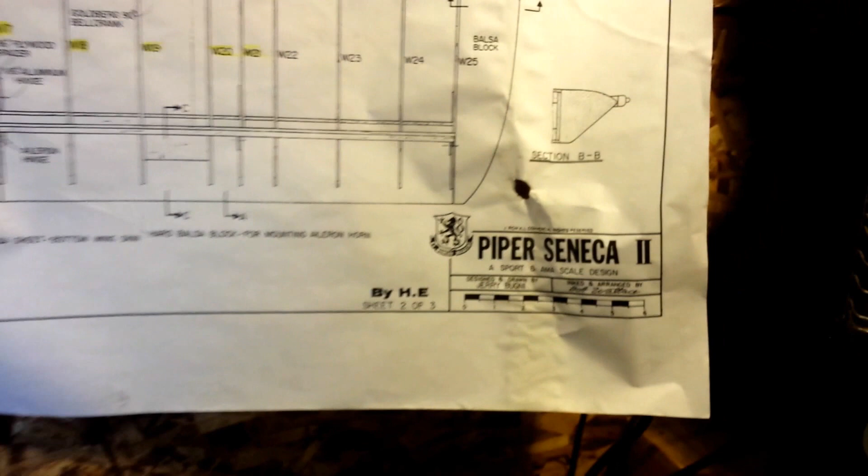Well, why are you in my shed? Well, this winter I decided to tackle this project. I've built probably about 15 kit planes, and I've never built a scratch plane before, so I've decided to go ahead and build this Piper Seneca II twin engine airplane, and I thought I would let everybody in on it.

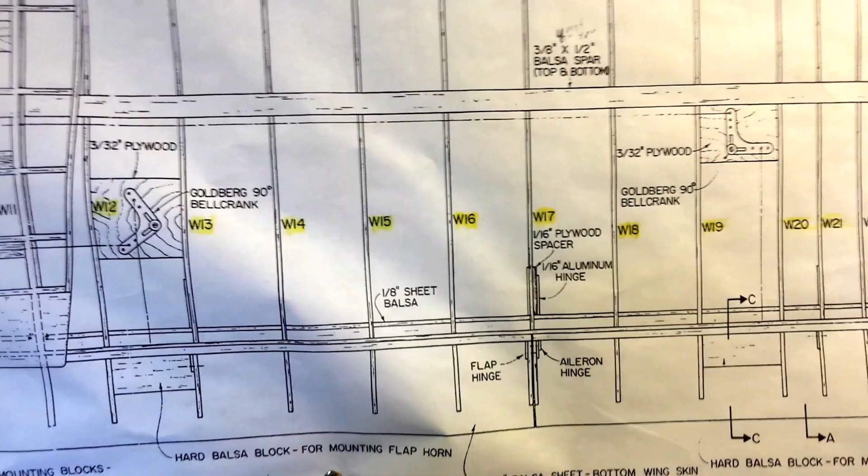So here we go. I just got the plans stuck up there so we could take a look at them real quick. I'm going to be making some changes on this. They got a lot of balsa. This whole thing is balsa, but that's the way they have it, and that's the way we're going to do it.

We're going to change the bell cranks. I'm going to put servos for each bell crank. I may do the flaps with one servo, but the throttle definitely and the ailerons definitely are going to have a servo just dedicated to them. But we're going to build this just like that plan says.

So I got the plans I'd say about 4 or 5 days ago, and I've started a little bit on it. I've worked on a few of the wing ribs, some of the formers for the fuselage. In fact, I'm working on one right now, F-15. And we got some more of the wing ribs here done, some of the nacelle parts, and I went out last night to the local hobby shop and I bought some more wood.

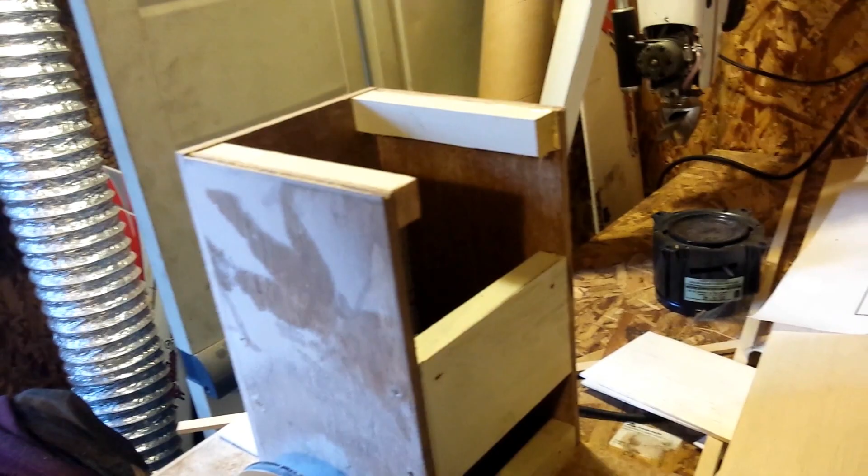But this is where the mess is. Oh, what a mess. But nevertheless, this is my homemade disc sander. Kind of neat, actually. I had a motor sitting around the shed for a year or so. Variable speed. Used a dimmer kit. It works. But this is where it's going to happen.

But let's get started. See where we're at here. Like I said before, this is what I'm working on right now. I'm putting everything in bags. I'm hoping to get this done in about 90 days.

It's winter outside here in upstate New York, and actually it's a weird winter. It's actually about 40 degrees outside now and raining. But I'm hoping to have this done to fly this season, this summer. But we'll see.

Who knows? But this is the former I'm working on right now for the fuselage, F-15. What I did was I took two pieces, 4-inch, glued them together, butt jointed them. I'll build another one and show you how I did that. But I was reading some articles online.

I could buy the wood, the thickness and the width that I needed, but then I started reading about how balsa is made, and they say that the larger the wood goes because of the diameter of the tree, like if you get an 8 or 9 inch piece, the edges are very soft, punky, and that you'd be better off gluing a couple 4-inch pieces together. The glues we use now are so strong, I don't think it's going to be an issue. But this is where we're at.

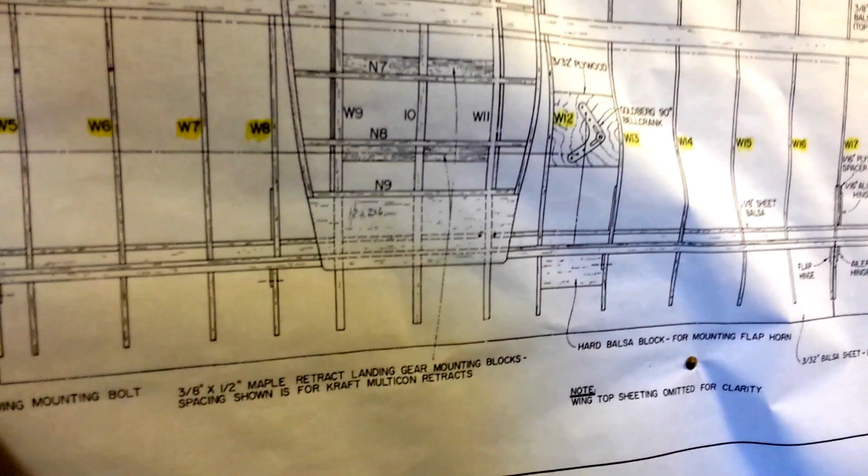Got a few of the formers done. I've actually got the wing ribs, which are 1/8 inch balsa. W1's finished. 5, 6, 7, 8, 12, 13, 14, 15, 16, 17, 18, 19, 20, 21. I got 4 more to do on the wing. And maybe we'll start assembling some stuff. What else do we got?

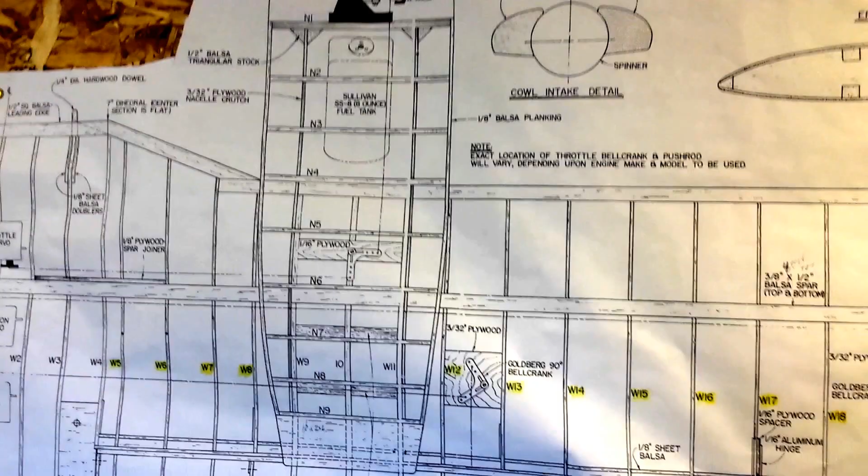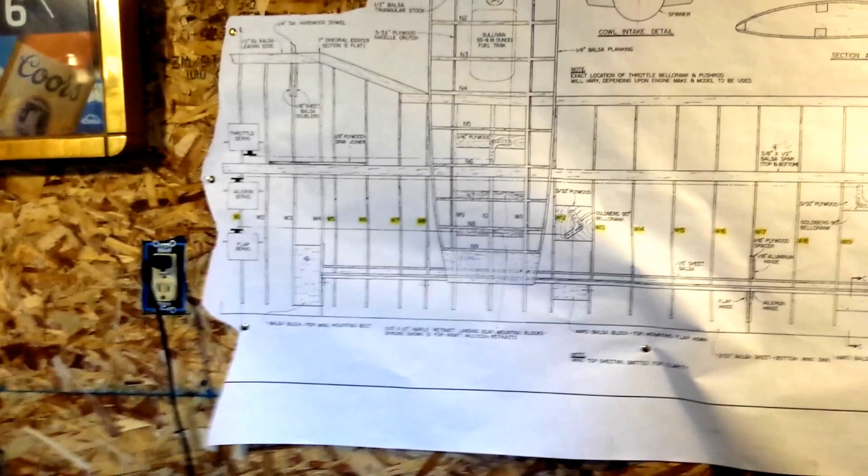Yeah, the motors. Let's go with the motors real quick. They say 40 RC engine showing. Well, I've been on RC Universe and I've talked to a few people who have built these planes, and that's not going to cut it. I'm going to put 4 strokes in it, at least 70, 4 strokes at least, and probably order those in a month or so when we get to that point. But this is where we're at.

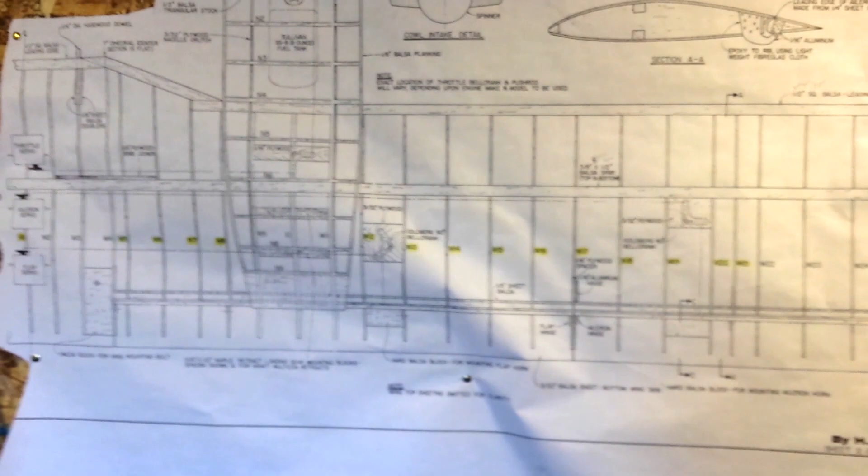We will be coming out here often if I'm going to try to get this done in 90 days. But we'll see. I'd like to try to fly it this year, but being my first scratch build, I'll probably be spending more time on the internet figuring out what I'm doing than actually building, but we'll get it done. Kind of unorganized as it goes right now.

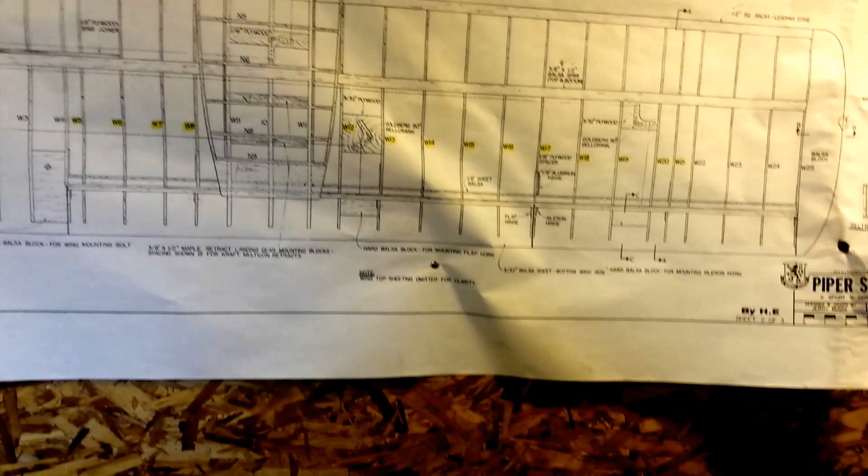Maybe I will lay out the parts that I've already got completed for you guys. I got some ailerons done, some of the formers for the fuselage, and a lot of the wing ribs. This is going to be quite a project. Let's see. That's about it for now, but we're going to try to scale this right out. Make a nice airplane out of this one.

I've been doing a lot of studying online about how to do raised panels and rivets and the whole 9 yards. So this is where it's all going to happen. There's a couple of my other ones I've got flopping around, but it's about 70 in here now.

I'm going to get working on a couple more of these formers, and I'll be back to tell you how it went. I'm going to make probably 3 more formers today, and a couple more wing ribs, and we'll get putting it together. Kind of a boring little process, getting all the parts together, but that was my plan, to try to basically build a kit and then put my kit together.

So I've already cut out most of the patterns. That was nice about the plans. They came with one sheet of all the formers for the fuselage, and one with the wing ribs and the nacelle part. You can see the nacelle part back there. There's another one of the wing ribs we got to cut out. That's actually going to be 3/16. Most of them are 1/8 inch, but that's where we're at right now.